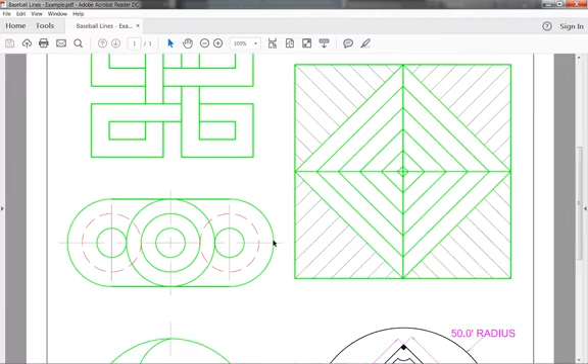This is part 2 of the baseball lines tutorial. We will walk through creating the next 3 shapes we've been given, these 3 geometric shapes, and we'll talk about the actual baseball diamond in part 3. Let's focus on this square object to start. Last video we looked at the Celtic knot, so now we're going to look at this series of concentric squares.

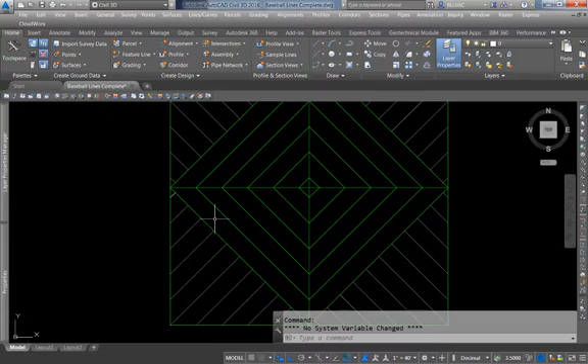I'm going to start with this central square. If I look at the relationship between the spacing here, I can see that all of these lines are evenly spaced, with the exception of this central square, which looks to me like it's a little smaller.

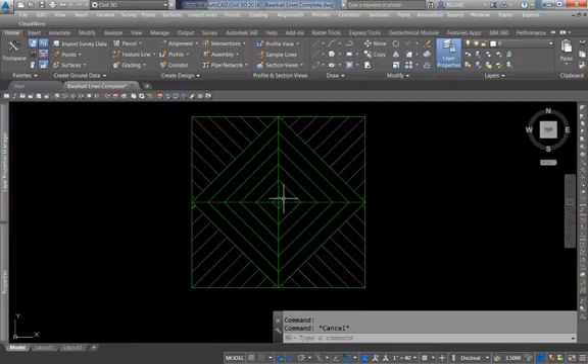The spacing from the very middle of the drawing to this first line looks like it's only about half the distance as from this point to this point. So from my central point to this point looks like about half a unit, and this can represent 1 full unit. So thinking in terms of unit spacing, I'm just going to create a 1/2 by 1/2 square, and that will be this square.

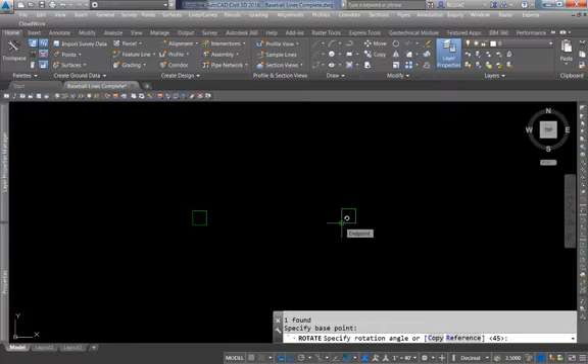So what do I have to do to it? Well, I have to rotate it. Oops, I don't want that, I want this square. I'll copy and paste that over, and I need to rotate that square by 45 degrees. So I just pick a point on the object to rotate around and specify my rotation angle, 45 degrees. And there we have the first square of our drawing.

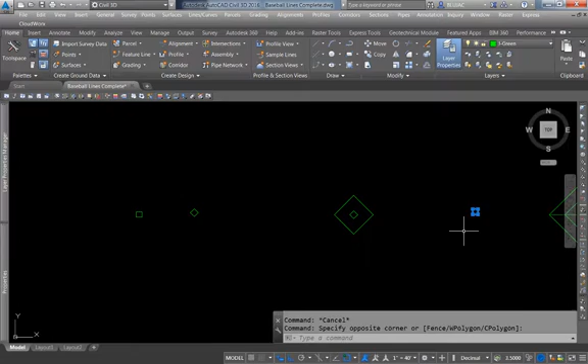Now from there, I can use the offset tool. Let me get rid of that. I can use the offset tool to offset that a distance of 1 unit. So I'll specify 1 unit, click on my object, and there you can see I have step 2.

And then I'll just continue offsetting 1 unit until I have 1, 2, 3, 4, 5 outer squares, so 6 total squares if I count this middle one. And we've already got 2, so here's 3, 4, 5, 6 squares.

And then all I have to do is connect the corners with a polyline, and again from corner to corner, polyline, which gives me this. The inner portion of this shape is complete now.

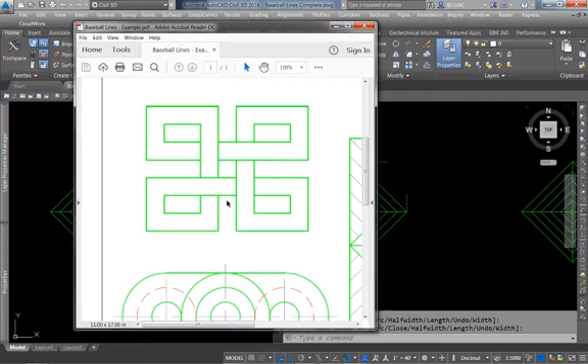So now I need to start drawing the larger box, or the larger square around this inner square. If I pull my PDF over here, you can see we've got this inner square drawn, and now we need to draw this outer box. So how are we going to do that?

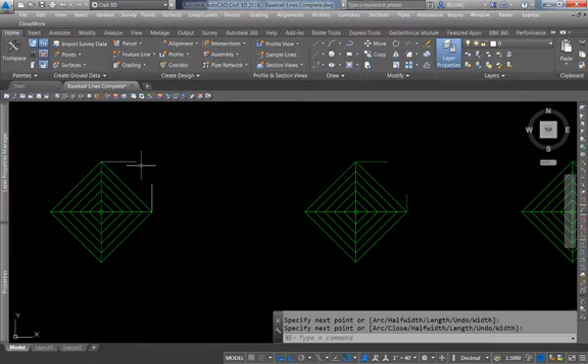Well, I'm going to start by just drawing some polylines, and I'll turn my ortho on. Ortho was on, I'll make sure it stays on. I'm just going to draw a couple lines vertically and horizontally, and I don't have to connect them. As you can see here, I didn't connect them.

What I did was I used the fillet tool, and remember always when we enter the fillet tool to check our command line, it's telling us to specify a radius. I want my radius to be 0. I don't want a curve, I want a sharp corner, and that's what we get if we specify a radius of 0 with our fillet tool.

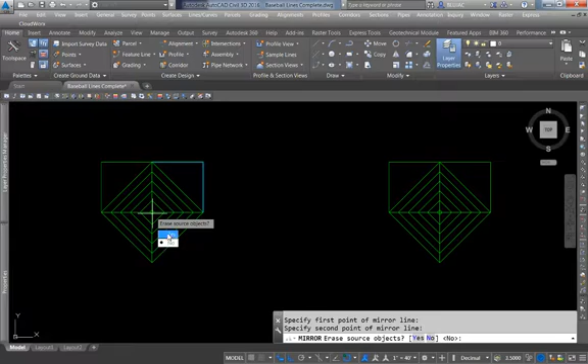So I can just move along here, and I could do the same thing to create this corner, or I could be a little tricky, select these 2 lines, and use the mirror command. So I selected this mirror button, and it's asking me to specify the first point of my mirror line. Well, I want to mirror across this vertical central line, and I do not want to erase my source object.

And so now I have half of what I need for my outer square. Again, I can take these 2 objects and mirror them across this midline, not erasing my source object. So now I have my outer square.

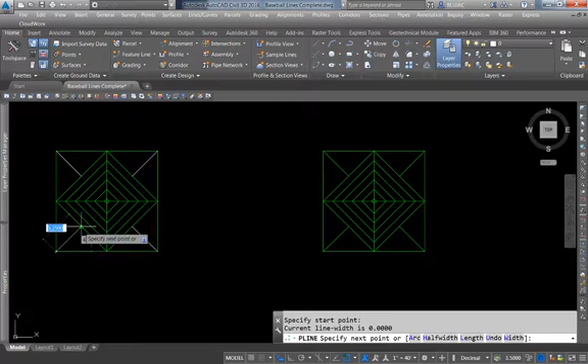Then I will just take a polyline and connect from the corner, turn my ortho off, corner to midpoint, and I'll do that 4 times. Notice my midpoint snap, that little triangle is coming on, and I'll do it again, midpoint, so corner to midpoint, which gives me this shape.

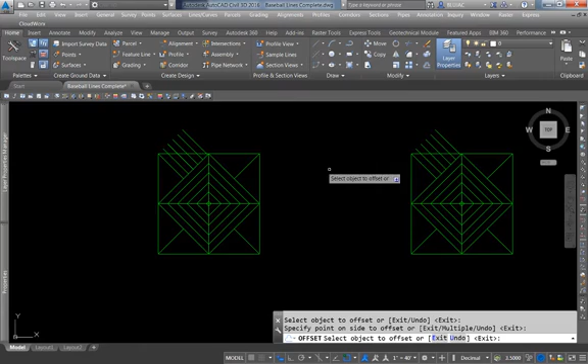And then I can use my offset command once again, offsetting a distance of 1 unit, and I'll start offsetting these lines I just drew in. One more I can fit in there, and I'll continue offsetting these lines, like such. And we're going to do that all the way around our object, so lots of offsetting.

And I'm kind of doing this the long way. Some of you might notice that I could simply mirror all of these lines across this midline, which would yield the same thing, or I could manually offset them all. Either way, you're going to end up with something like this.

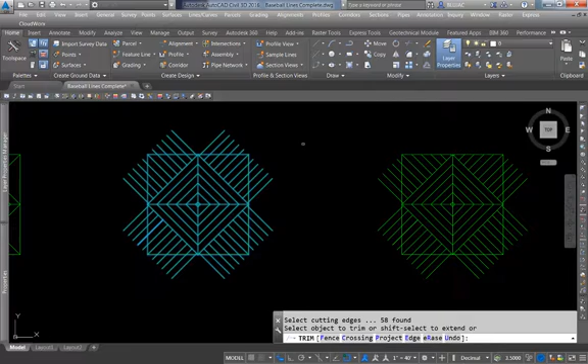And then we can select all our lines and start trimming away, or I could have typed trim. Notice sometimes in the trim command it will let me trim away multiple lines at once, so I didn't have to click on a dozen lines there, I just drew my selection box across what I wanted to trim and it cut them away.

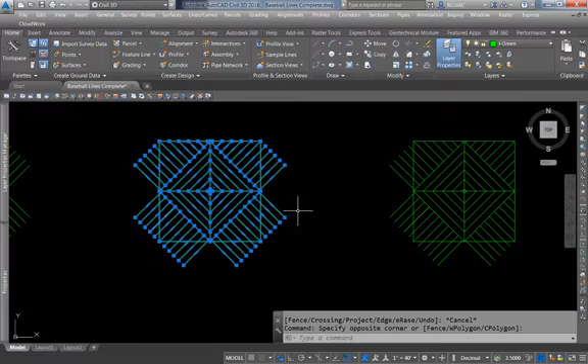So I'll do that again here. Looks like we trim away the right side next, so I'll draw my selection box and you can see which lines are going to be trimmed.

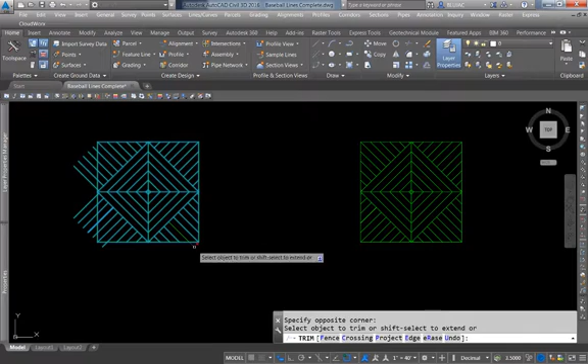And I will continue trimming away. So trim, trim, trim, missed a couple. And here I'll trim them away. And so we have our final shape.

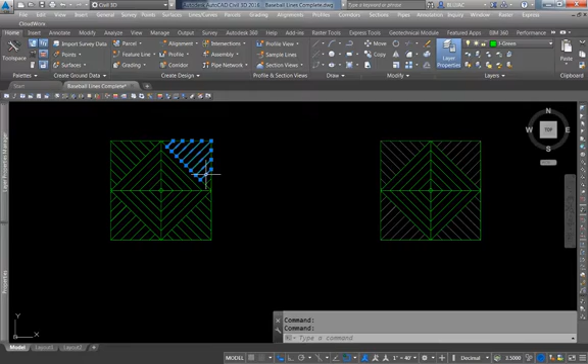Now we just have to move some lines to the correct layer. I guess the easy way would be to click on all these connecting lines, and I'm being careful to select only the lines I want to change.

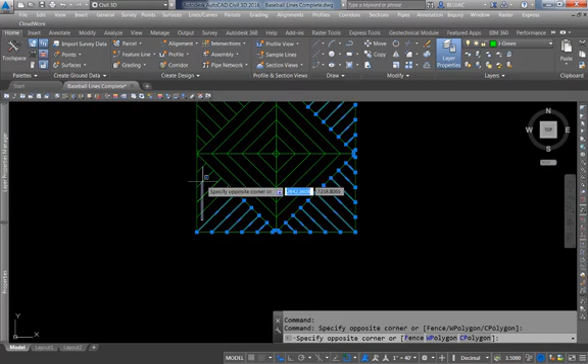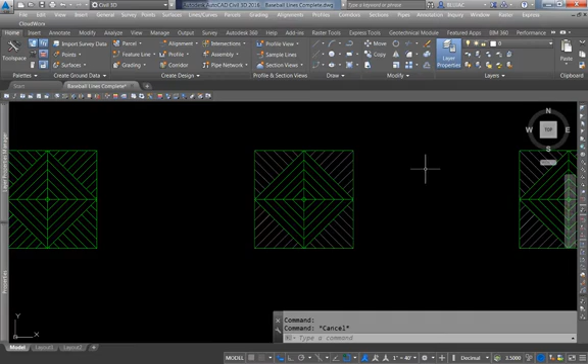Almost done. Couple more. So I've got all the lines that I want to be gray selected, and I can simply go up to my layers and select the correct layer. And here we have a finished drawing.

So that's the first shape that we're going to go through in this part of the tutorial. Next, we're going to talk about this series of concentric circles.

So again, I'm going to start with this inner circle, and I'm going to assume that has a radius of 1 unit, so I'll simply draw a 1 unit circle. And using my offset command, I can just offset that inner circle until I have 3 concentric circles.

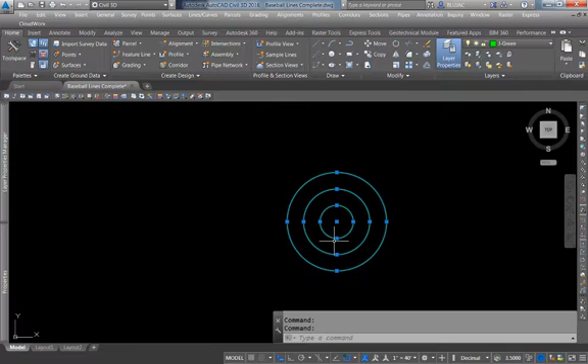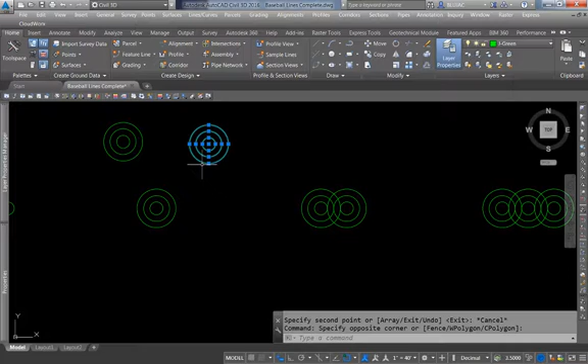Then what I'm going to do is take that and copy it. I'm going to copy it from the base point, and I'll just copy it a couple times. Then I think it's easier if I select one series of circles and enter the move command, or I could have selected move up here in the ribbon.

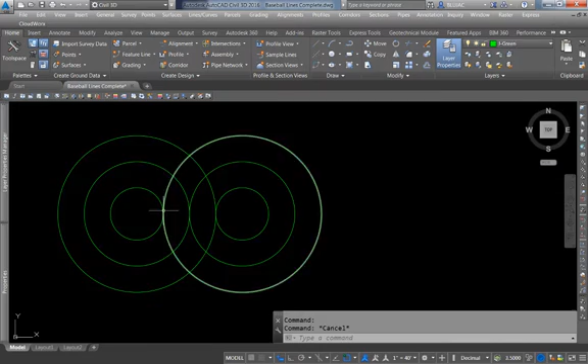And I want to move this quadrant, so I have my quadrant snap turned on. I'm going to snap it to the east quadrant of this inner circle to get this shape.

Then I'll take this other circle that I copied and move it, select it and move it, and I'm going to take the eastern quadrant and snap it to the west quadrant of my inner circle. So I get this shape.

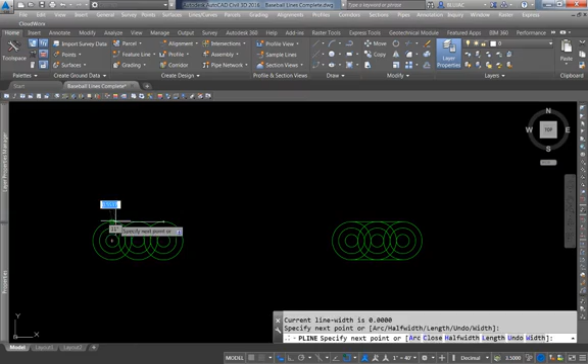Then I can draw a couple of P lines. So P line, and I'm going to snap from the north quadrant to the north quadrant, and also from the south quadrant to the south quadrant to give me this.

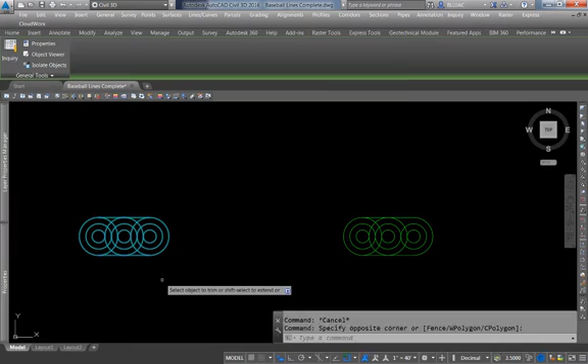And then I can do some trimming. Notice I've trimmed away the remainder of this first outer circle. So I can select my lines, type trim, and I want to trim away these portions of the circle I don't need.

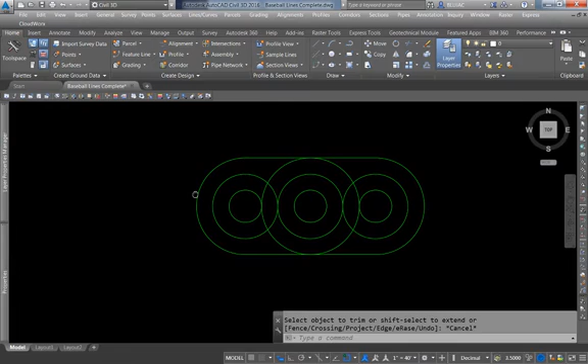And I'll do the same thing again, trim, and trim away the portions that I don't need, until I have this. Now this is most of the line work that we need.

And we can start moving objects to different layers. So if I pick these two circles and select my red dashed layer, you can see we're starting to get close.

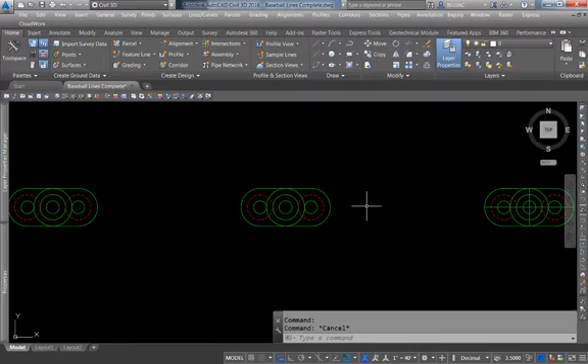And then I need to add some more polylines. So I will enter the polyline command, and I'm going to go from midpoint to midpoint, or quadrant to quadrant. They should be in the same place. Here's midpoint to midpoint, yielding this shape.

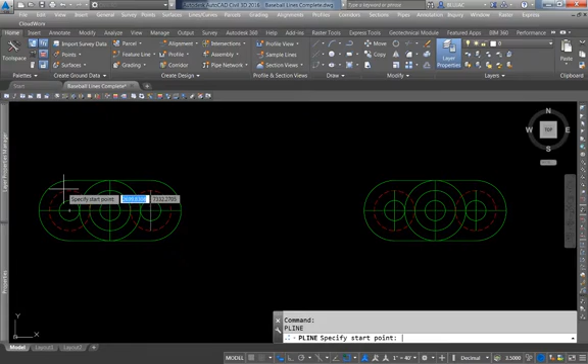And I'll throw in a couple more P lines for these smaller circles. So quadrant to quadrant, north quadrant to south quadrant, giving us this. And then I want to extend these lines past the boundaries of my border here.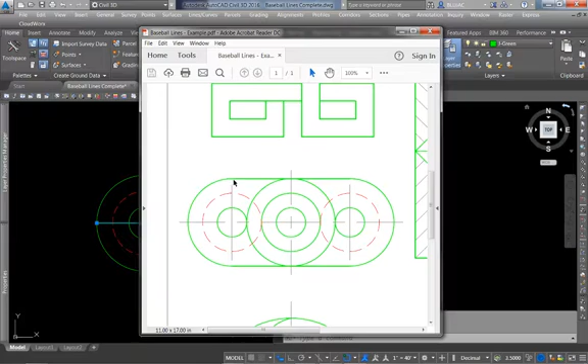So I'm going to have to extend these lines a little bit. And if I look at the PDF, it looks like they extend about a half a unit beyond the boundary line. Same with this line, it's about halfway between, so about a half a unit extension beyond.

And that's what it would give us. How I did that was I looked at this line, and if I select it and use the grip edit, it tells me right now it's 4 units. I can start moving my cursor up and type 4.5 to make the total length of the line 4.5 units, and it extends that line a half a unit upwards.

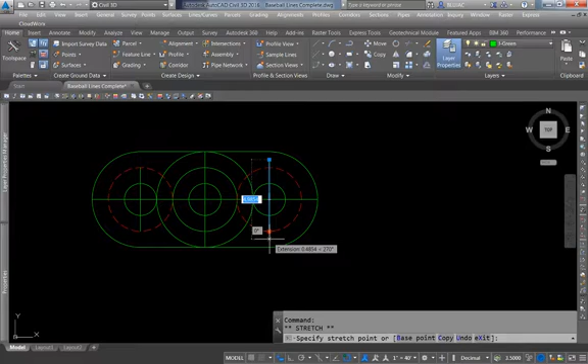I can do the same thing. Now the total length of my line is 4.5 units. I want to extend it down another half a unit to make the total length 5 units. That would be one way to do it, or I could just say I want the total length to be 5 units, then move that line from the midpoint back to where it should be.

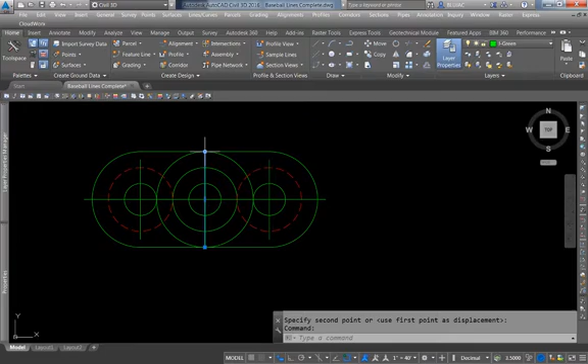This line is 14 units long, so I need to make it a total of 15 units long, then move it from the midpoint back to the center. Same thing here - if I hover over one of the grip edits, it tells me it's 6 units long, and I can stretch it to make it 7 units long, then move that line from the center point back to where it should be. So that's all the line work.

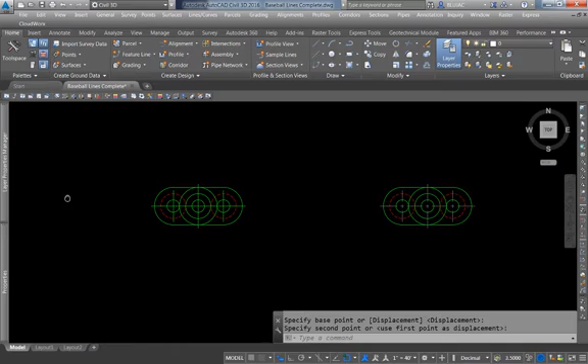Now I just need to move some of these lines to the correct layer. These lines obviously go to my gray center line dashed layer, and that will give us a finished drawing. So that's shape number 5.

Shape number 6 is this kind of pinwheel. Again, I'm going to start with the circle, the easiest shape. There are no units in this drawing, so I'll just assume a 5-unit radius. So I'll draw a 5-unit radius circle, which is what we have here.

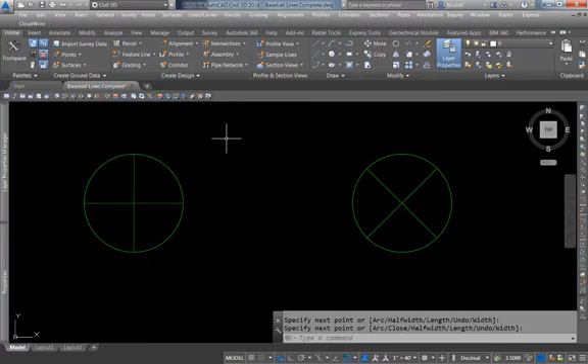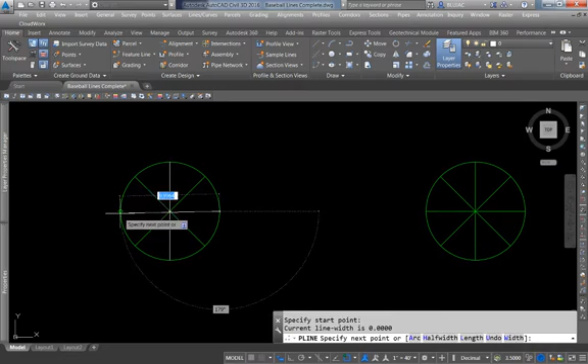I will just connect quadrants with a polyline. So I'll draw a polyline command, quadrant to quadrant, and again quadrant to quadrant. Then I want to rotate that shape 45 degrees. So I can again connect quadrant to quadrant with a polyline - quadrant to quadrant and quadrant to quadrant, giving us this shape.

Now what I have to do is start converting to arc. So if I click on one of these lines and hover over the center grip edit, convert to arc is one of the options. If I select that, look at what happens if I snap to the midpoint on one of these lines. So I'll snap to the midpoint.

Oh, I know why it's not letting me snap to midpoint. I'm going to convert this back to a line - I forgot the first thing I have to do is add vertices. Right now this is one continuous line, and I need basically half a line, but I need 2 of them. I could do the same thing with this line, or I can add a vertex right at the middle.

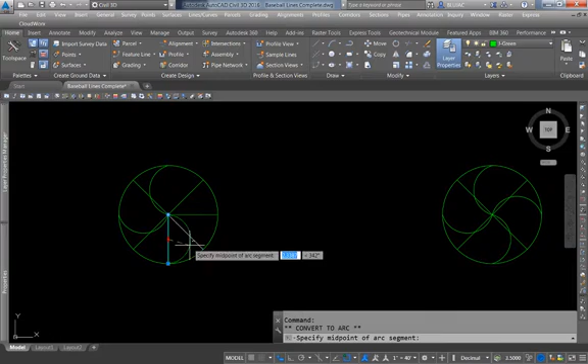So now I can convert to arc and snap to the midpoint on that line. Same thing here - convert to arc, snap to the midpoint, convert to arc, snap to the midpoint, convert to arc, snap to the midpoint. So I have this shape.

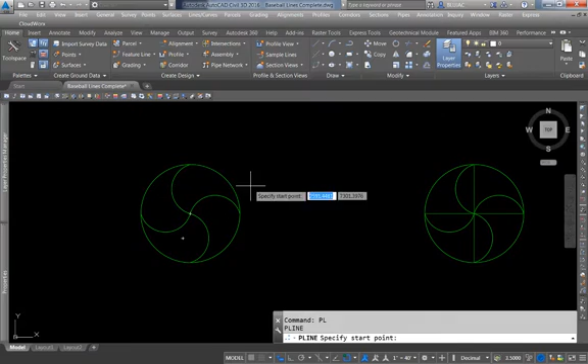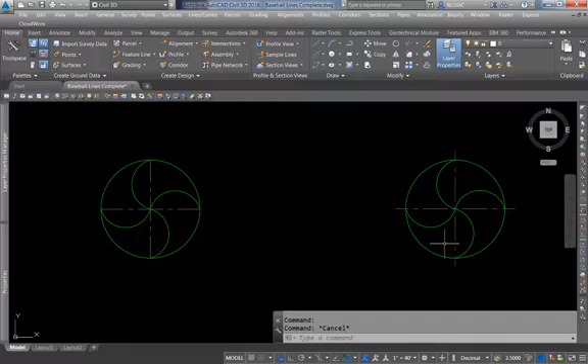We're almost done. Now I can delete these drafting lines and then simply draw in a couple of polylines connecting the north and south and east and west quadrants, giving us this shape. Then simply move these to the correct layer that has that gray center line type. I can extend out maybe a unit on each side like I did in the last shape, and we have a finished drawing.

So that's the second half of the baseball lines, sort of geometric shapes, and in the third video we will tackle the actual baseball diamond.